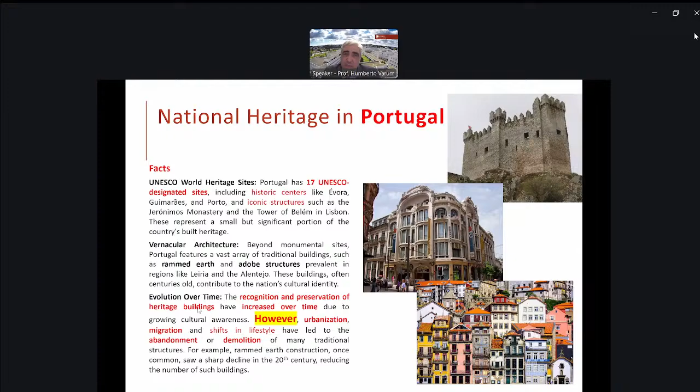But coming down in this list of values associated to our heritage, we should consider that apart from the heritage recognized by UNESCO, each country, and also for the case of Portugal, we do have a very long list of pieces of heritage that are recognized with value at national, regional, or eventual municipal level. And then moving again to other level, we have all the rest of the heritage that constitute our cities, our built heritage, that needs preservation, needs conservation, needs attention. So, in fact, the problem of heritage is a complex problem.

Allow me to say that since one of the main uses of the buildings is housing, we have to consider that there is an important concern in the world, which is the impressive increase of the prices of our houses, but also the renting prices are increasing a lot, at least in Portugal, as in many other countries in Europe. We are really close to a crisis. So this is something that has to be considered from the engineering perspective in order to look for solutions.

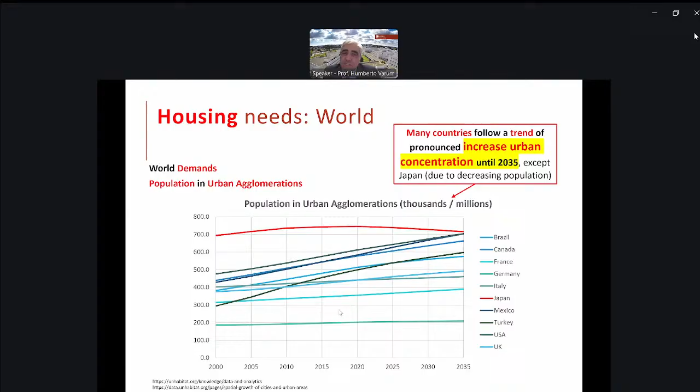And I'll come back to the problem later. In another direction, we have to recognize that in many countries in the world, we are still in a positive derivative tendency in the movement and immigration of population to the big cities, something that's also happening in Portugal. We're also assisting to a concentration of people in our larger cities. This is something that is a big concern where the engineering should find solutions.

And so saying that, around this problem of housing, for sure part of the problem can be, I will not say eliminated, but reduced, attenuated, by adapting our existing buildings. So this is why we should consider more and more seriously the conservation and the rehabilitation of our heritage.

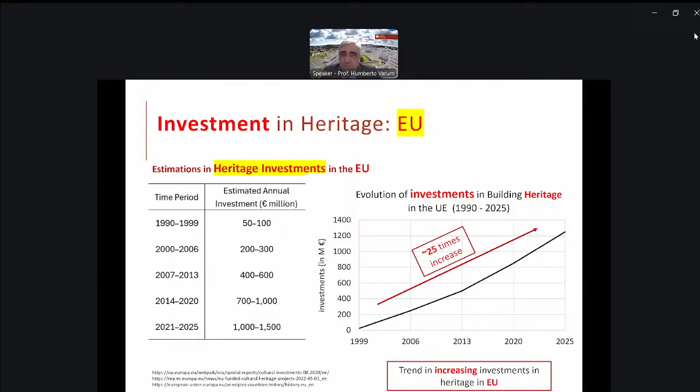We have to recognize that at least in Europe, in the last 25 years, we had an enormous increase of the investment in rehabilitation, in particular the rehabilitation of heritage. So it is also important to highlight that we should not stop this movement. We should, in fact, keep the investment in the rehabilitation of our heritage, and also not just the special heritage, but also the common heritage.

In another direction, I'd like to say that in many countries in Europe, and also in Portugal, we are in a positive derivative of the growth of cultural tourism that is pressing our cities, is pressing our heritage. So this is something that should be considered in all the policies of conservation and preservation of our heritage.

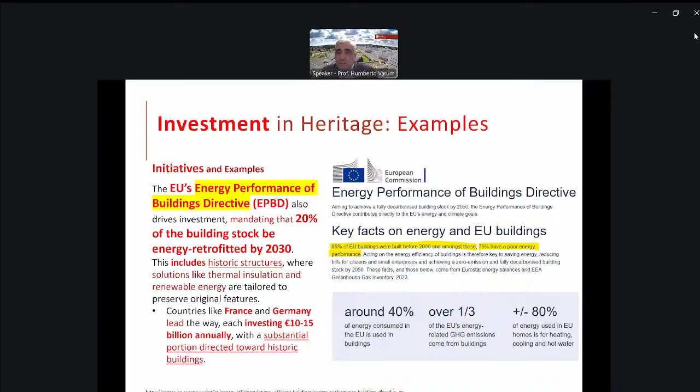In fact, in Europe, we have a very good set of examples of initiatives financed or incentivized by the European Commission in order to promote the rehabilitation of our buildings, both from the historical and heritage perspective, but also intending to improve their performance in terms of energy, as well as in terms of thermal comfort. We had, eventually not in the same measure, but you have in Europe also some initiatives that incentivize the improvement of the safety of our heritage.

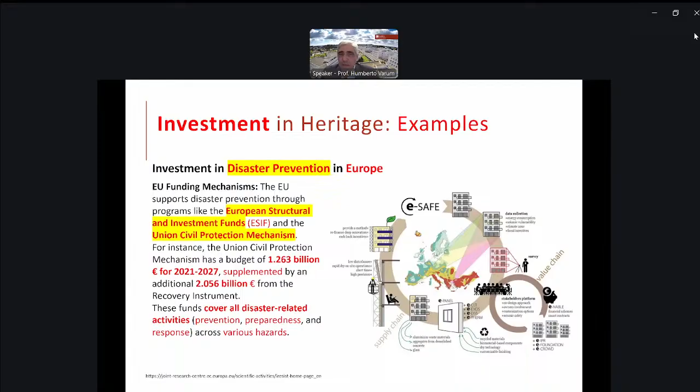I do believe, and there are very interesting movements in Europe that try to promote a renovation of heritage, provoking an equilibrium between the energy efficiency and thermal comfort, as well as the structural safety, particularly in all regards the seismic safety. And I truly believe that you should go in this direction, you should try to avoid eventual programs, eventual initiatives that will promote only energy improvement, energy performance improvement.

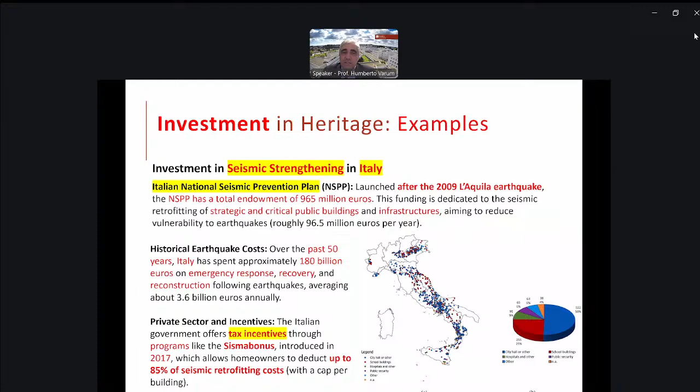Allow me please to refer here an example. This is the case of Italy, for which with different initiatives, there have been different programs that have promoted private initiatives and also some public initiatives in order to improve the seismic capacity of the buildings and of all the heritage in generic terms, for example, based with tax incentives.

But the interventions in heritage present a long list of challenges. Allow me please to highlight a couple of them. First, I have already referred to the pressure of tourism.

Second, the strong immigration movements that you are assisting all over the world, also in Europe. We should recognize that society is nowadays more demanding in what regards the performance requirements for our buildings. The codes we have in support of engineering activity are more dedicated to new buildings. Of course, sometimes you adapt, we have some codes specifically dedicated to rehabilitation, but eventually they are not at the same level of detailing as the other codes we use for new buildings.

And then the costs associated to rehabilitation, in fact, they tend to be higher in some situations, and that has to be considered. Another problem affecting many regions of the world is the shortage of skilled labor, workmanship, and also some experts in certain expertise fields. In civil engineering, for example, we are really witnessing a moment in which the demand from society is not at the same level as the number of civil engineers educated in our faculty, something society should look at with rigor in the future.

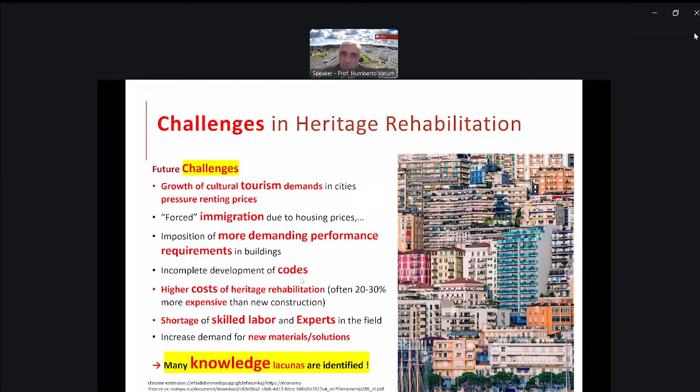And then another very important problem is knowledge. I should recognize that there are many situations where you are doing intervention in heritage with the proper level of knowledge of the building you are intervening in, with proper knowledge of the problems, with proper knowledge of the safety levels that we intend. But in many situations we are doing interventions eventually without an adequate level of knowledge. We'll come back to this point later on.

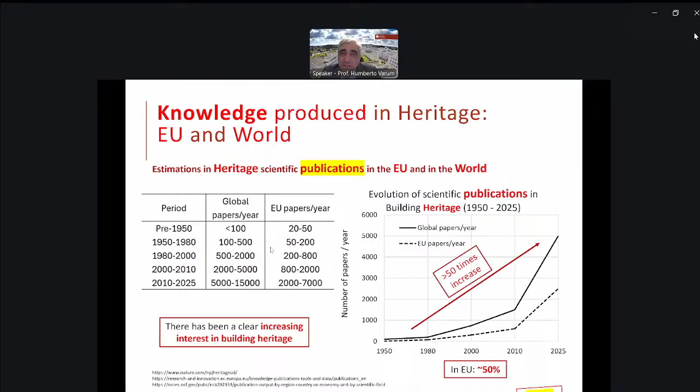The scientific community all over the world, but also in Europe, has given increased attention to the problem of heritage and to the problem of conservation and restoration of buildings. This is shown by numbers, for example, by publication numbers. But I have to say that we as academics should put our effort into simplifying the results of our scientific outputs in order to make them available and useful to society — the enterprises, the owners, and the urban planners who really need our research output, but simplified and oriented towards real interventions.

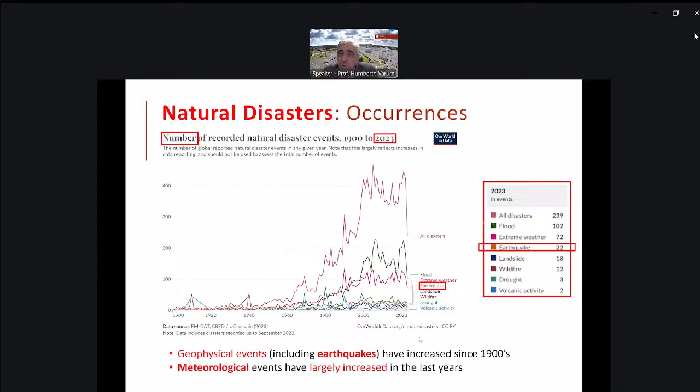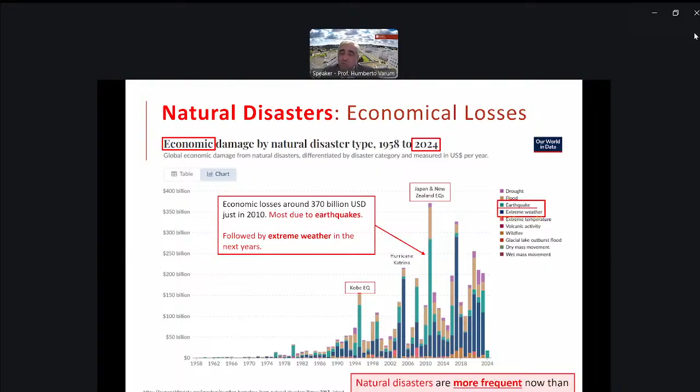In another direction, we can see in this plot that in the years you have one or more strong earthquakes, we see a peak, because among all the important natural disasters that affect our built heritage, earthquakes, when they happen, tend to affect larger areas, and they put to proof a larger number of buildings and infrastructures.

Among the natural and man-made disasters affecting our built heritage, allow me to refer to earthquakes. Here are some numbers. We recall every year, in particular these last years, severe earthquakes in different regions of the world that caused an important number of fatalities, people affected, and important economic losses. But of course, storms and windstorms are very frequent, particularly in some parts of the world. Floods, allow me to say, in Europe in the last 4 decades had caused larger economic losses due to floods than other regions of the world recognized for this source of hazard.

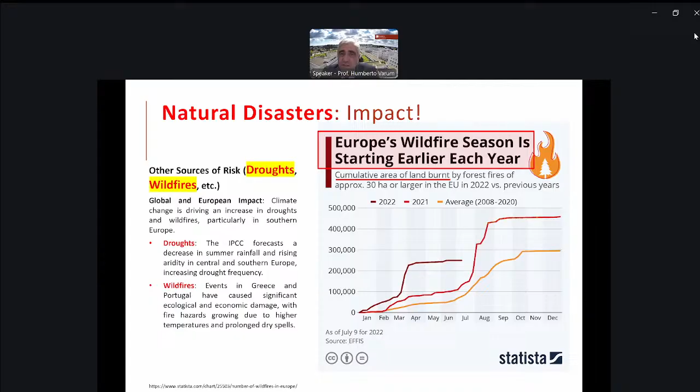In what regards wildfires, we are recognizing that in some parts of Europe, and also in Portugal, wildfires are starting earlier in the year and lasting for longer periods, which is a big concern, because in some cases they are also affecting built areas. Fires — we all recall the important fire that destroyed parts of the Notre Dame Cathedral. We also had, in Portugal in the 80s, at the end of the 80s, a very important urban fire that destroyed part of our city, our capital.

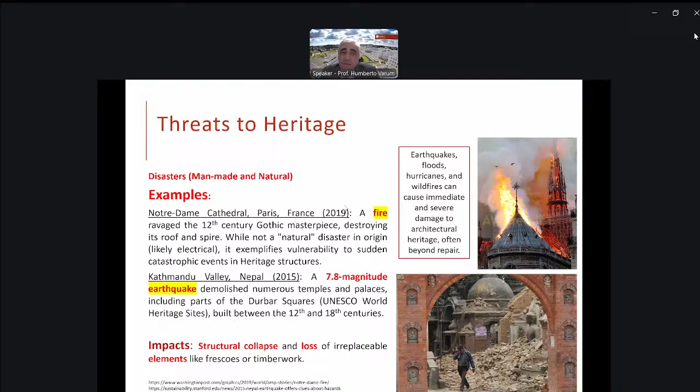In 2015, we can refer as an example the big earthquake that affected the Kathmandu Valley in Nepal. We also remember well the recurrent flooding affecting Venice in Italy, and some heavy rains affecting Machu Picchu, Peru, but also other areas around the world.

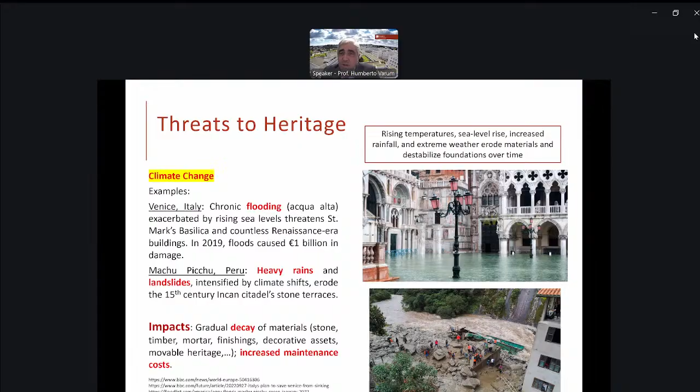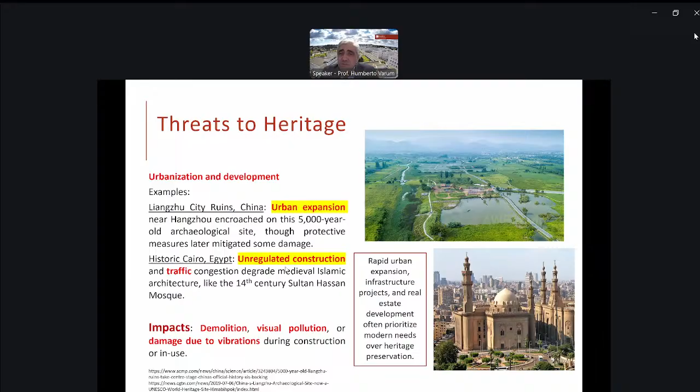Climate changes, in fact, are affecting more regularly our built heritage, something you have to consider. In regions where urban expansion puts pressure on our heritage, but also where you have unregulated construction, these are other vectors that put enormous pressure on our built environment regions.

War and conflicts are also putting pressure—I can refer to the crisis in Syria and Bosnia-Herzegovina, and we know well the crisis you are living in Europe. We hope this will soon be overpassed, but again, war and conflicts are affecting our built heritage, not just buildings, but something you have to consider.

Vandalism and pollution, especially in some parts of the world, are also affecting our communities, but particularly our heritage. Tourism overload is very important in some monuments, but also in some regions, particularly in Porto City, for example.

Nowadays we are living this experience. In fact, the overload pressure coming from tourism is putting pressure on the city center, on our built heritage, and something that has to be considered and solved from an engineering perspective.

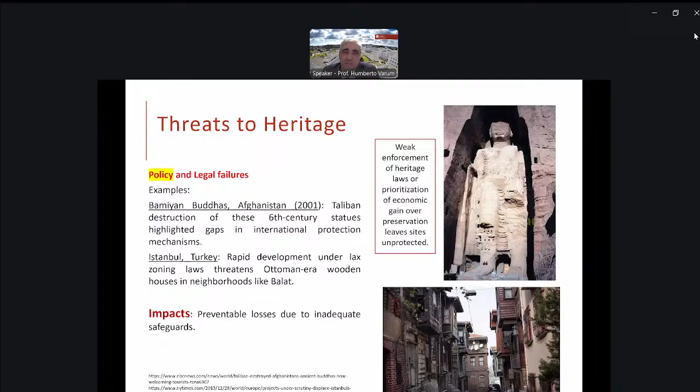Aging, of course, and then eventually some legal failures or improper policies in built heritage conservation may compromise the future of this important heritage that you have inherited and that you intend to pass on to future generations.

So allow me to revise the concept of risk. We are all familiar with this concept, but it's always important to come back to it. Risk is influenced by three main pillars, three main vectors: hazard, vulnerability, and exposure.

The hazard, for example, can be redefined in terms of the source of hazard coming from seismic activity—though we could redefine this concept for other types of hazard too. For seismic hazard specifically, hazard can be defined as the probability of a certain seismic action occurring in a certain place, with certain characteristics, for a certain period of time.

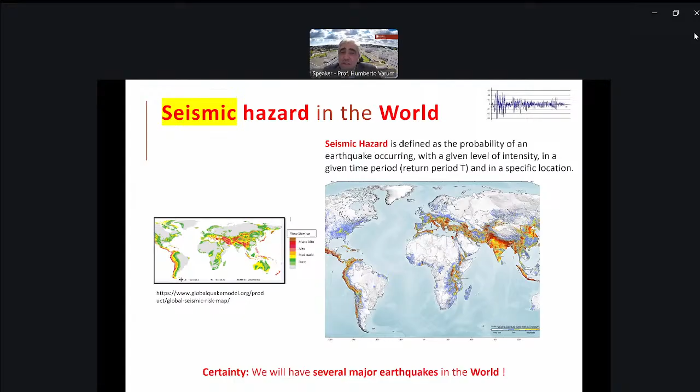We know that you are monitoring continuously all the globe, so we know much more nowadays than in the past regarding seismic hazard. But of course, you cannot predict when the next earthquake will happen and how it will affect our heritage.

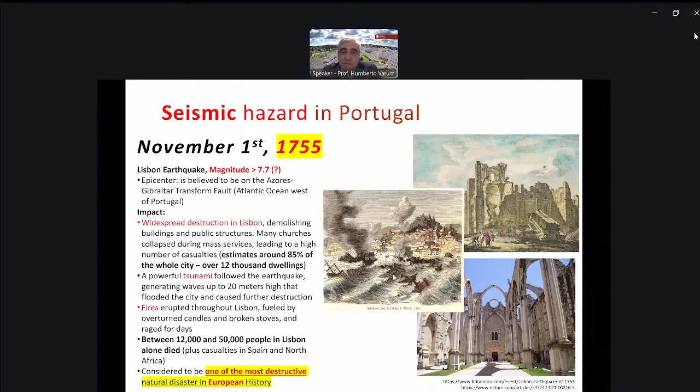It would be incorrect to talk about earthquakes in Portugal without referring to the big earthquake in the mid-18th century that changed the history of Portugal and also had important influence on the history of the world. It is recognized as one of the most destructive natural disasters in European history.

Another pillar that affects risk is vulnerability. Vulnerability, to define it simply, is the capacity that buildings or building infrastructure have to respond safely to a certain level of demand.

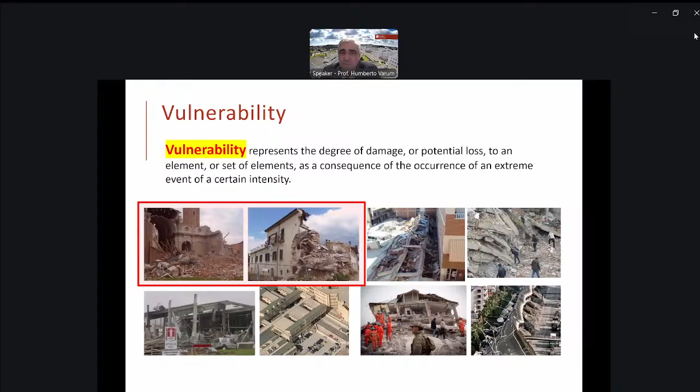Then there's exposure, the third pillar, related to the number of people using the building or infrastructure, and eventually also related to the economic and cultural value of the goods associated with the building.

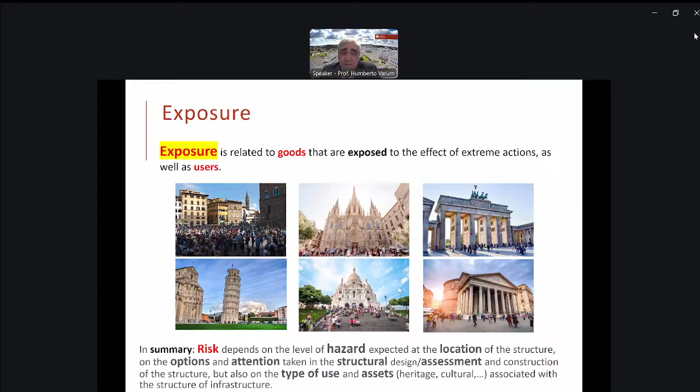So recognizing that risk is influenced by those three vectors, when we're talking about new buildings, new infrastructure, or new cities, from the engineering perspective we can manage risk by influencing those three vectors.

But talking about heritage, we recognize that we cannot do the same—our capacity is limited. We should put all our effort into reducing the vulnerability of the existing heritage in order to reduce the risk.

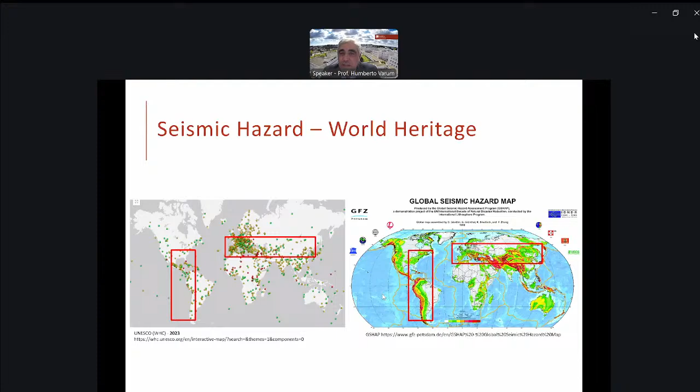In this final slide of this part of my presentation, I'd like to highlight that a great part of our heritage cities, a great part of our oldest and most important heritage, is located in areas with moderate to high seismic hazard. So talking about conservation of this heritage should always be done considering the eventual seismic activity and seismic hazard.

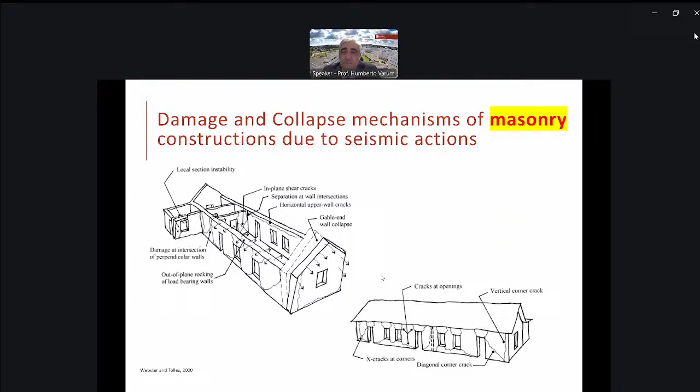Very briefly, allow me to revise the more common causes of collapse or poor behavior of our existing buildings. Let's start with older constructions made of masonry, eventually with some timber elements at the roof and floors. Before the introduction of reinforced concrete in current buildings, construction all over the world was based on those natural materials.

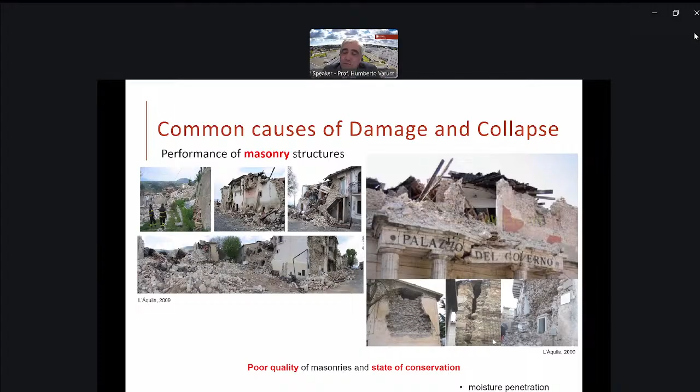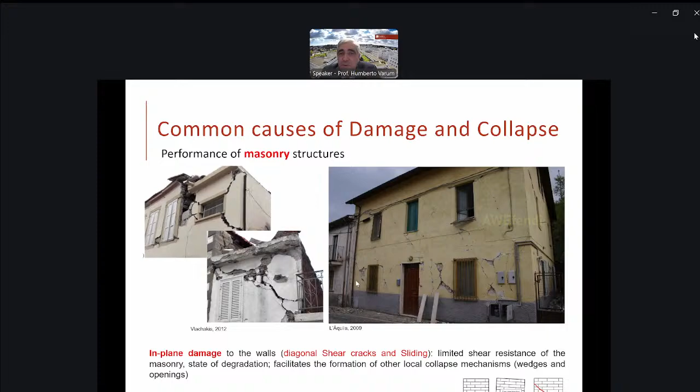We do recognize from the experience we have from research, but also from all that we have observed and keep observing in regions affected by earthquakes, that our masonry, when poor in quality or in a poor state of conservation, may affect the performance of our buildings. These typical masonries normally have very high stiffness and attract large amounts of force, but they have a weakness: their capacity in-plane is limited, and when they collapse, they collapse in a fragile manner.

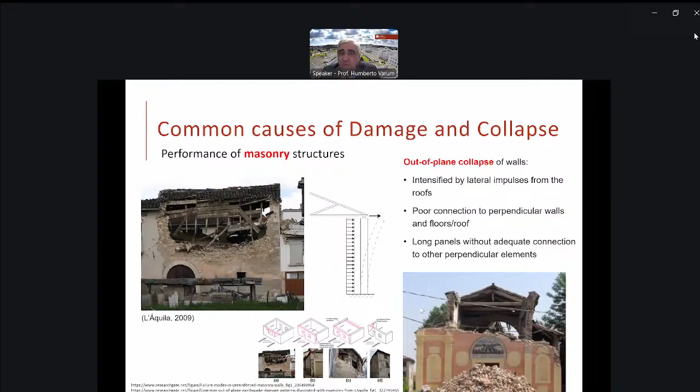Also, depending on the geometry of the buildings or infrastructures, and on how the different components are connected among them, they may in some situations exhibit vulnerable out-of-plane collapse, something that is quite studied in different universities in Europe.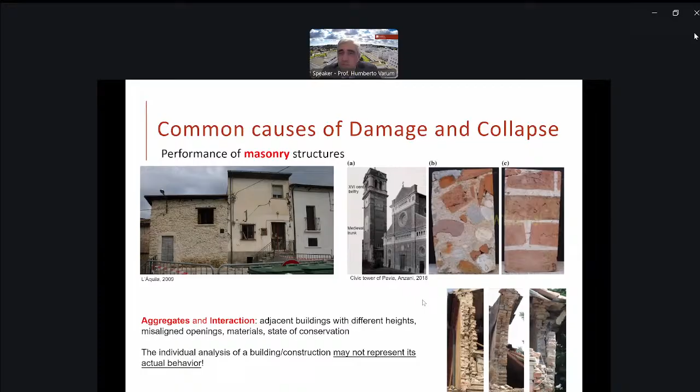Critical points such as building corners and openings tend to concentrate demands, and these are points where damage can start. In aggregates, in urban areas, the interaction between buildings in some cases may save our buildings, in other cases may eventually promote

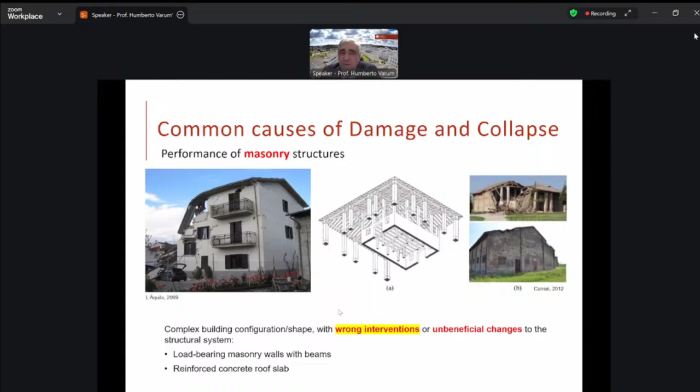the collapse or poor behavior. Finally, we have to consider that in some cases, interventions on buildings using inadequate materials or inadequate solutions may eventually increase the vulnerability of these old structures.

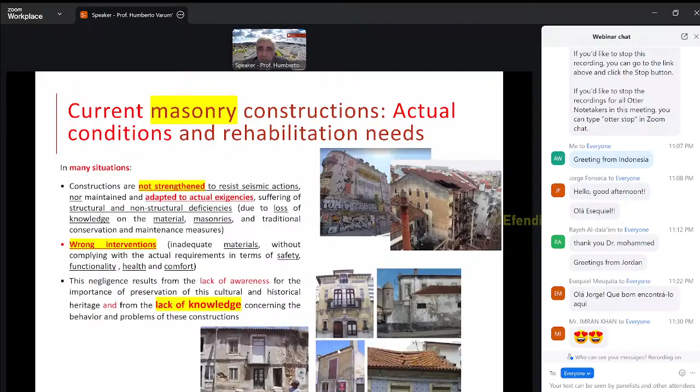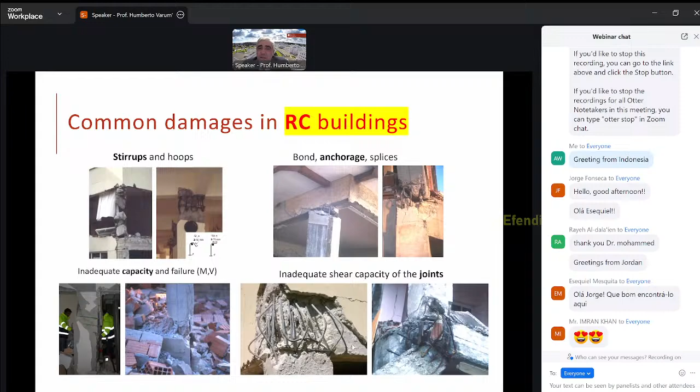Moving now to reinforced concrete buildings, we know also from observing areas affected by earthquakes, and from research results all over the world, what are the potential weaknesses of our building structural elements. Of course, the detailing of stirrups, the details of anchorage splices, beam-column joints, or the connections between walls and slabs, all of which must be properly designed and detailed to promote proper behavior.

But then we have the well-known strong beam, weak column mechanism, especially in older buildings that were designed mainly for vertical loads or very low lateral demands. These may present mechanisms that tend to provoke premature collapse of these buildings, including the short column mechanism and irregularity, something I will come back to later.

And again, the interaction between buildings in urban areas is a problem that may affect the capacity and, at the end of the day, the safety of our buildings.

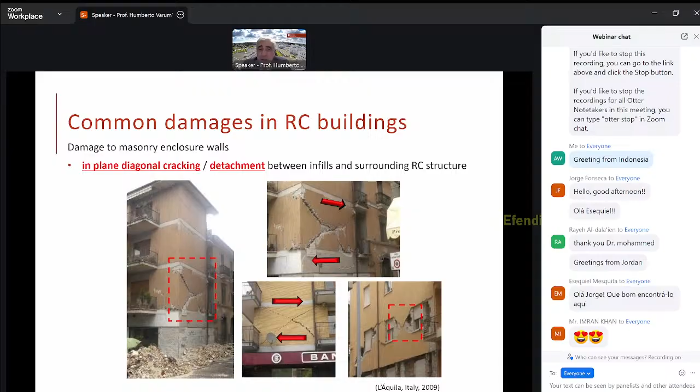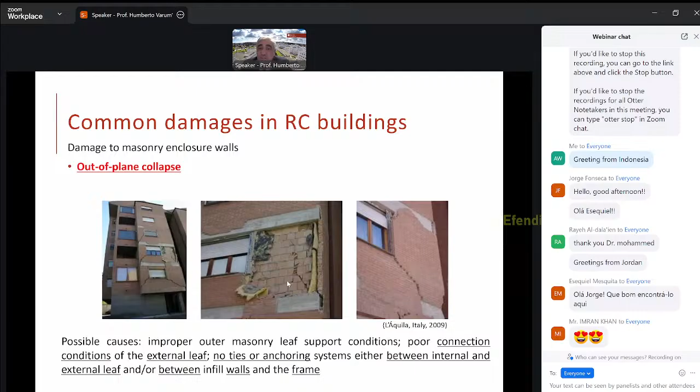The in-plane capacity of non-structural elements, in this case our infill masonry: we know that this type of infill masonry may be very rigid and stiff, but has associated fragilities because it has limited capacity and tends to behave in a fragile manner. The out-of-plane collapse, something I will return to later, is also recognized as a potential fragility of reinforced concrete buildings.

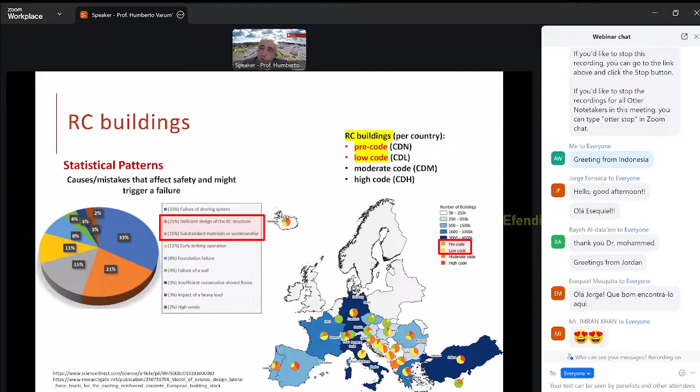From statistics, we may find in the literature different authors presenting and discussing these numbers, but allow me to say that a great part of our modern built heritage in reinforced concrete was designed and constructed in a period when codes were not at the same level of development as current codes. So an important part of our built heritage was designed prior to modern codes, or with first versions of national codes that were not as rigorous or detailed as those used nowadays in designing new buildings.

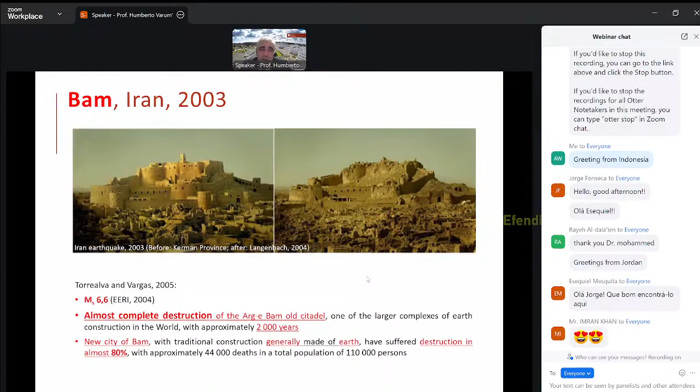From recent earthquakes, we have learned messages, and you keep learning messages every time an earthquake affects our built heritage. Allow me to refer to the city of Bam, practically totally destroyed during the earthquake in 2003 in Iran. Another example: in Peru in 2007, a big earthquake affected the city of Pisco, where about 80% of the buildings collapsed or suffered irreparable damage. I'm talking about houses, but also some churches and other types of important heritage.

Also in Peru, in 2014, a moderate earthquake of magnitude 4.9 affected particularly Pisco, and again here almost all the adobe constructions were damaged, including some churches. This means that many of our existing heritage, especially the oldest with poor materials, are in fact vulnerable, and we have to recognize this, keep attention to it, and prepare future policies to consider this fact.

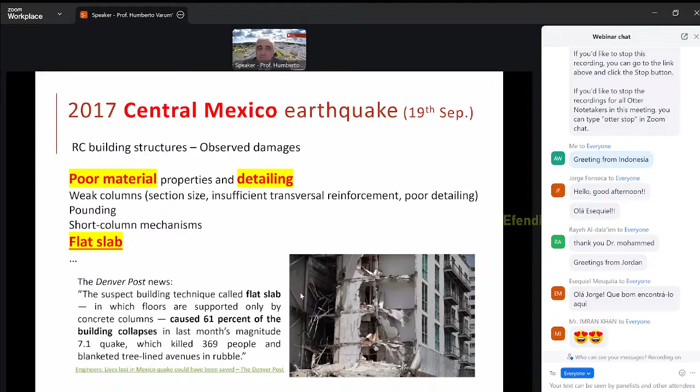Central Mexico, 2017: among the buildings that collapsed or experienced poor behavior, the same causes were identified: poor materials, poor detailing, flat slabs, which is a big concern for us nowadays, and irregularities.

If you compare what happened in the big earthquake of Mexico in 1985, this was at that time one of the causes appointed as a justification for the poor behavior of many buildings. In 2017, 30 years after, irregularities continue to be one of the main important problems, especially in building corners, in these recent earthquakes in Mexico that affected Mexico City, as you can see in this video.

So the non-regular distribution of infills in plan as well as in elevation ends up promoting an irregular response, an irregular distribution of the damage, and eventually promoting the collapse and poor behavior of some buildings.

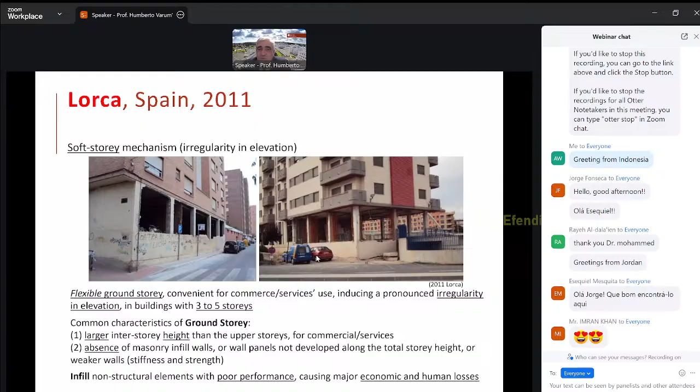And again, in Lorca, 2011, one of the causes associated with the poor behavior of many buildings was again associated to the irregularity, especially for buildings with eventually regular structural systems but with irregular distribution of infills.

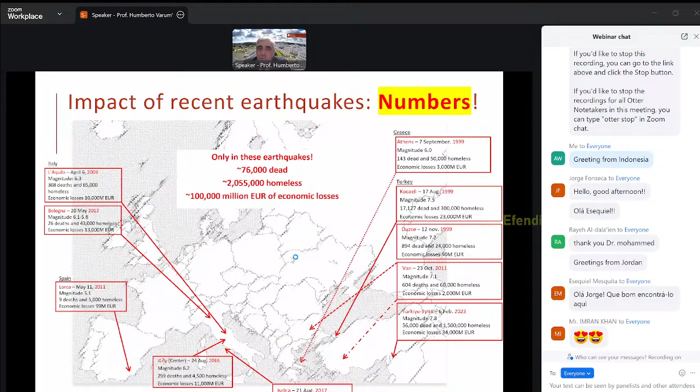From the numbers, summing up the impact of the recent earthquakes in the last 25 years in Southern Europe, we have seen, considering both affected people in terms of life, in terms of homeless, but also considering the economic losses, that those numbers keep increasing. We should do our effort in order to put the civil engineering knowledge in the response to this problem, in order to prepare better our buildings, to prepare better our heritage.

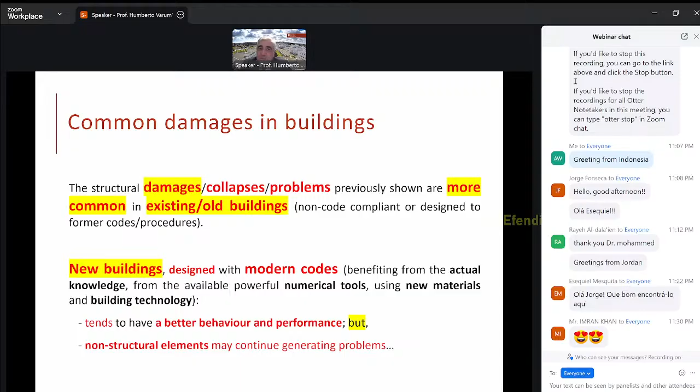From all that you have seen in these last decades, we should recognize in a simple manner that most of the problems are located in older buildings that tend to be more vulnerable. But be careful, because new buildings designed with new codes, if you are not putting proper attention to the problem of irregularities as well as the influence of the infill masonry, eventually you are introducing in our built heritage new buildings with new types of vulnerabilities.

In what regards retrofitting approaches and solutions, in fact we do have many solutions, but we know that in the decision of an eventual strategy to be adopted in the rehabilitation or retrofitting of a building or a set of buildings, we should consider a long list of parameters. But please allow me to detach one: knowledge.

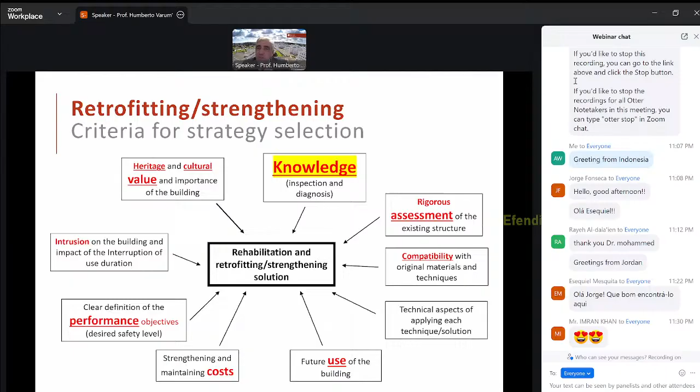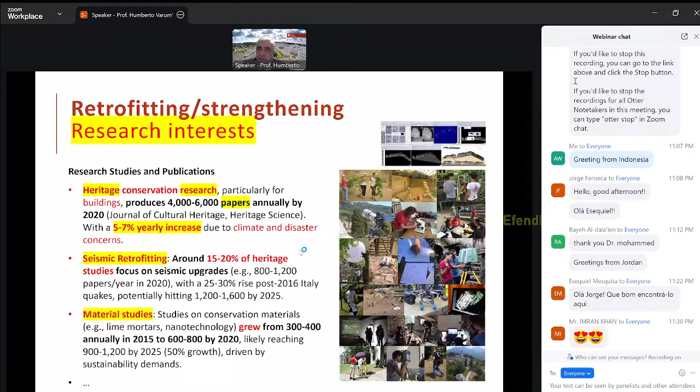In fact, we do have more and more examples of good interventions with rigorous approaches, adopting the proper materials with a proper analysis. We are preparing better and better our professionals to approach this problem. Our companies are also getting new skills, and they are getting more and more prepared to approach this problem. But we should highlight that, in fact, in any intervention, in any decision, we should take the decision based on the proper level of knowledge.

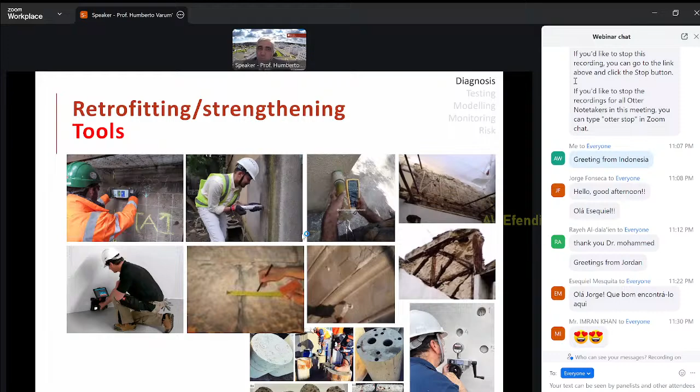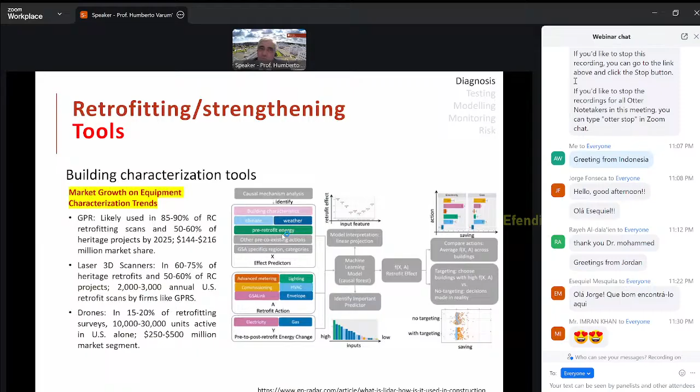As Tiago referred in his introduction, in fact, you have a long set of tools that may support us from inspection until the intervention. We have new tools that are becoming more and more commonly used in the characterization of our buildings, in the characterization of the pathology. We should use them, and in fact the numbers highlight that this is happening.

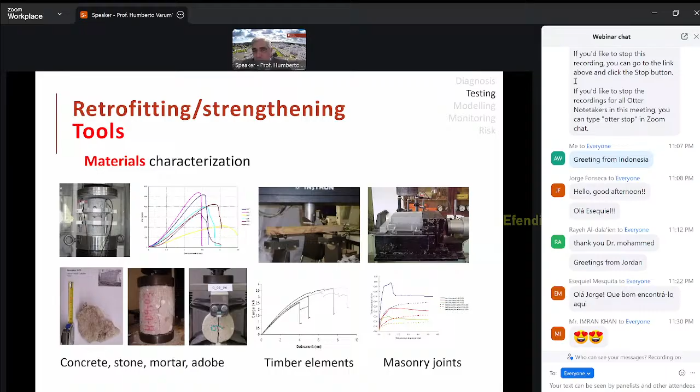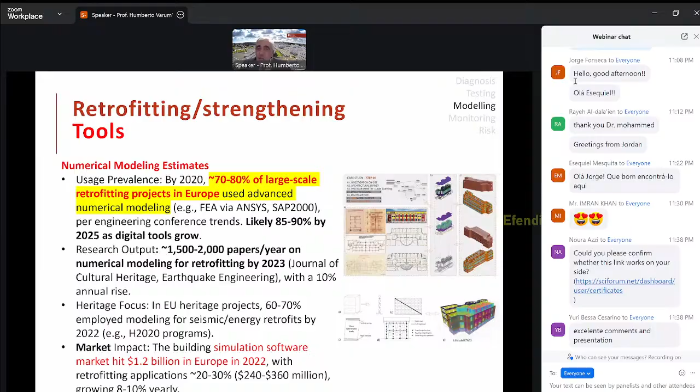In fact, we do have in our laboratories, we do have in our universities, but also many companies are getting new skills and new capacities in order to test properly the materials as well as the structural systems. In terms of what regards modeling, we have powerful models that are used more and more in the characterization of a built heritage building, that allow us to take a more rigorous decision at the time that you are proposing some solution.

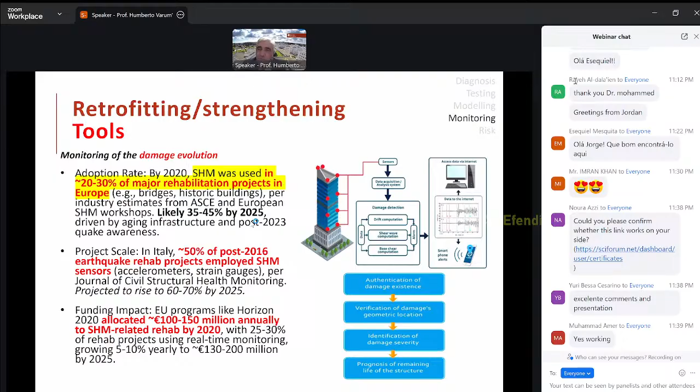But those models need calibration. You should consider that apart from the test characterization, we also have to use, and you have this potential to use, monitoring, also something that will be the central speech of Professor Ilara. But something that I have to recognize, even though we have these powerful tools, they are still underused. You have to reinforce more and more the use of this strategy in order to better understand the behavior of our buildings as well as of our infrastructure.

In fact, those tools give us an enormous opportunity to do better our job, to prepare better the intervention of rehabilitation. But we should never disregard the contribution of the engineering as well as the other professionals in controlling all the process, from the inspection until passing to the phase of design, but also in controlling the intervention.

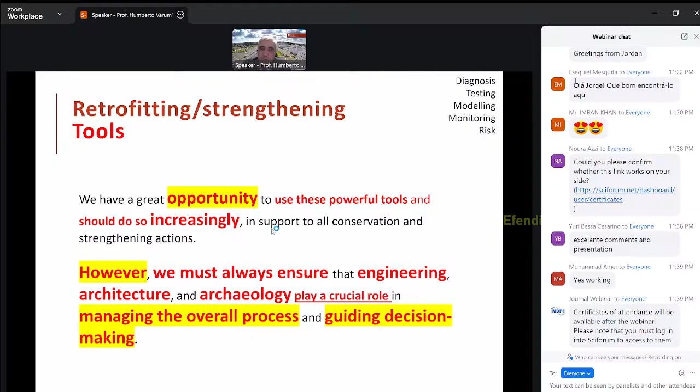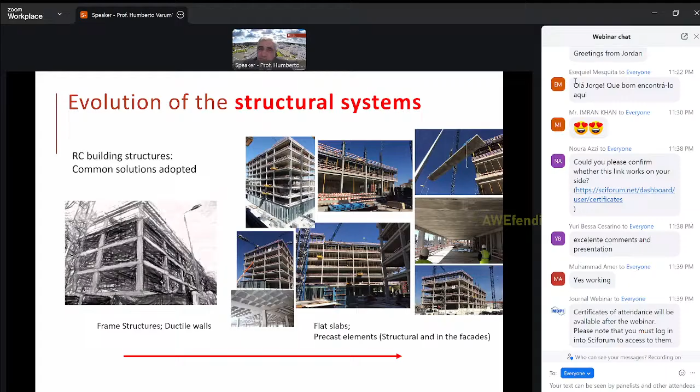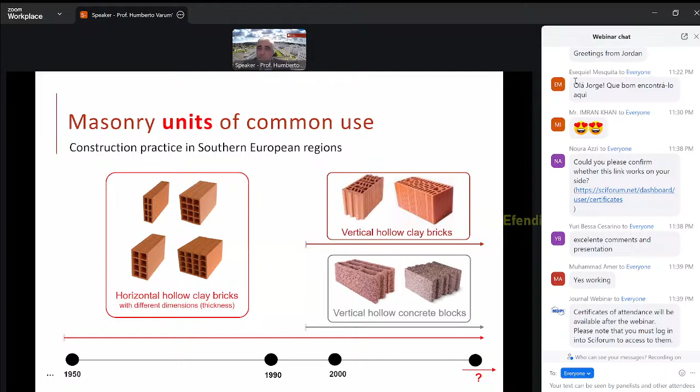So those tools will be an enormous help supporting all the interventions, but the engineering contribution should always command all the process. To conclude, to define policies for the retrofitting or rehabilitation of built heritage, we should understand properly how the structural systems evolved during time in the construction of the buildings, but also the non-structural materials and solutions, how and how much we have introduced changes during time, because different buildings from different epochs may present different characteristics, so any decision should be based on proper knowledge of that.

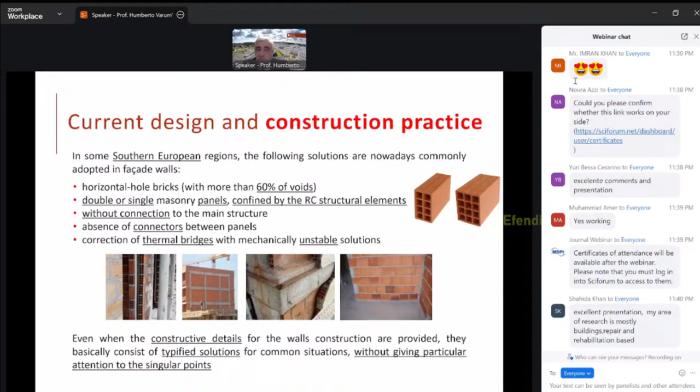Allow me to say that, from our experience, the detail followed in the design, detailing, and construction of non-structural elements is not at the same level of rigor as that posed in the detail and construction of structural elements, something that has to be looked at in the future.

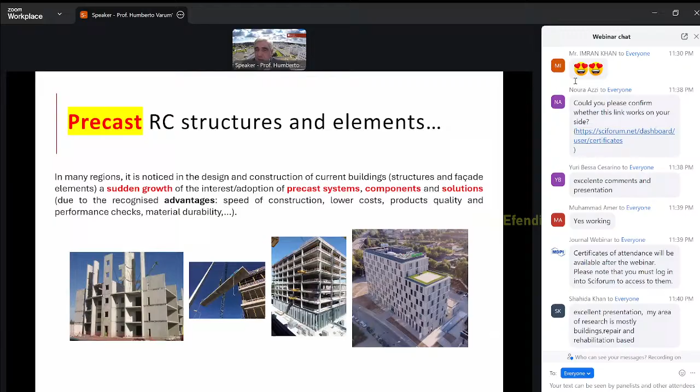Precast: in many regions of the world, due to the crisis in housing, but particularly in Portugal, we are seeing an important introduction or reintroduction of precast systems and solutions in the construction of our buildings. We should not leave our industry alone. We should put our universities and expertise in support of those companies in order to develop solutions that respond to safety, which is our basic requirement in our constructions, our buildings.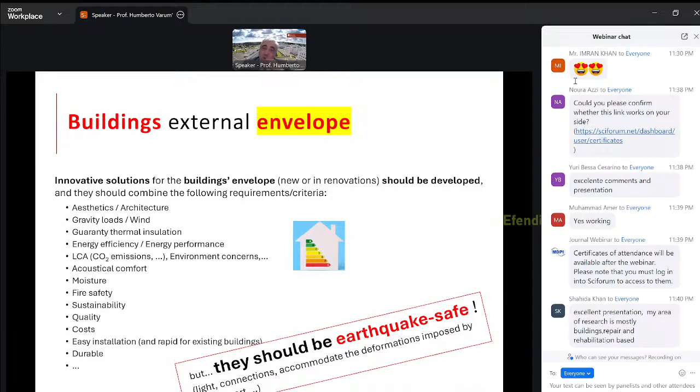We know and recognize that due to the over-regulation of the construction sector, we have enormous pressure in the decisions we take in our buildings to accommodate a long list of requirements. All of them are very important, but any solution we adopt, both in a new building and in the retrofitting of an existing building, we should recommend solutions that respect that long list of requirements but should not introduce new vulnerabilities.

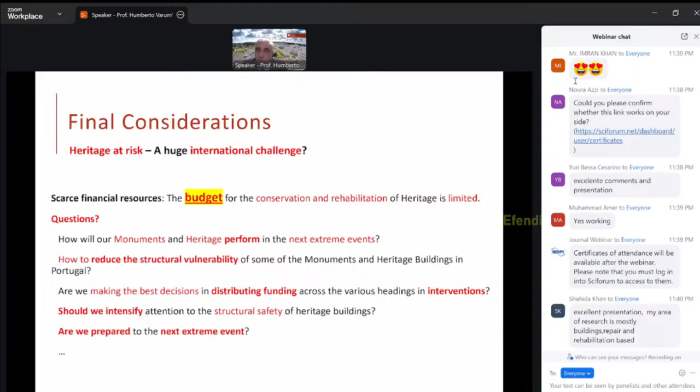Talking about heritage, the challenge is huge. We should be prepared. Budget will always be limited, but from an engineering perspective, with engineering tools, we'll be able to embrace this problem. Solutions, as requested by Tiago.

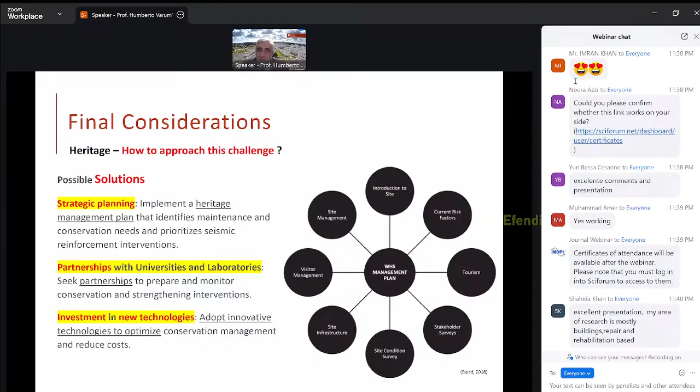First, at the national and regional levels, we need strategic planning for retrofitting and conservation of our heritage. We need to use more and more the partnerships between universities, laboratories, society, designers, constructors, and building owners. We have to increase investment in new technologies. We have to produce standards and recommendations adequate for rehabilitation.

We have to insist on the development of professional training, from workmanship to the more skilled engineers. And we have to raise public awareness about this big problem and this big challenge, which is our heritage. With that, I conclude. Thank you for your attention.

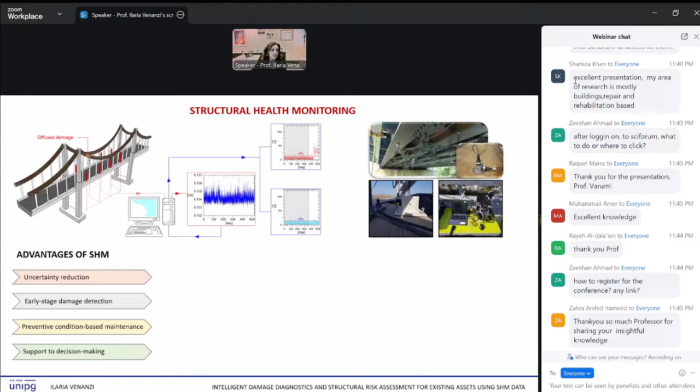SHM presents many advantages in the context of safety assessment, as it allows uncertainty reduction, early stage damage detection, and it supports condition-based maintenance and decision-making. SHM involves several stages, from the simplest to the most complex.

Stage 1 regards damage detection, answering the question: is the structure damaged or not? The following two stages regard localization and quantification, answering where the damage area is located and what is the extent of damage. The final stage is damage prediction, answering what is the remaining service life of a structure.

Analytical techniques to perform these tasks can be classified into data-driven and model-based approaches. Data-driven approach relies on sensor data and uses statistical algorithms or machine learning to learn patterns that distinguish healthy and damaged states. Conversely, model-based approach uses physics-based analytical or numerical models, and damage detection is performed by comparing the structure's measured behavior to the predicted one exploiting the model.

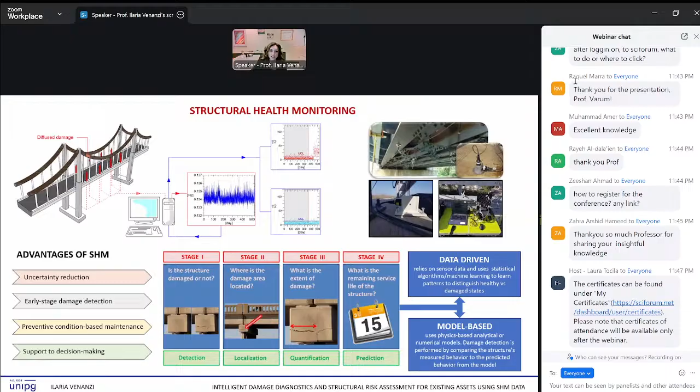Data-driven approaches mainly answer the first question; they can be used for anomaly detection, while to assess damage location, quantification, and classification, very often we need to refer to model-based approaches. If the task is damage classification and tracking of damage evolution over time, we need to refer to a model-based approach.

So we need to calibrate a high-fidelity finite element model using all the available information: original structural design information, non-destructive evaluation, and structural health monitoring data, to calibrate this model.

This model constitutes a relationship between input and output parameters. Input parameters are damage-sensitive parameters, like those related to stiffness of different parts of the structure, and output parameters are response parameters that we can obtain from a structural health monitoring system.

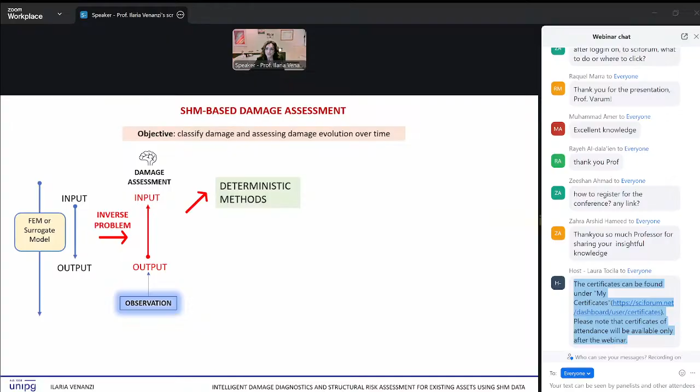We can use deterministic methods that formulate the inverse problem as an optimization problem and try to minimize a cost function that measures the discrepancy between measured and simulated response. Or we can use Bayesian approaches that frame the inverse problem as a probabilistic inference problem.

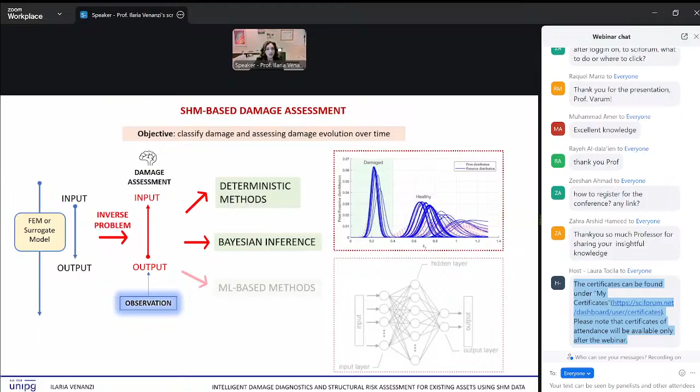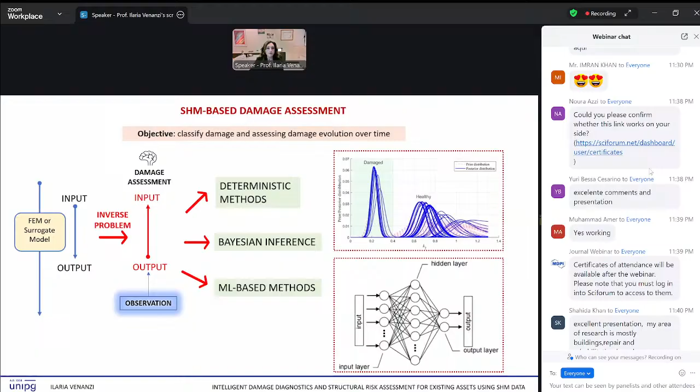Finally, we can use machine learning-based methods that solve the inverse problem by learning directly from SHM data, with little or no explicit physical modeling.

Based on this, in the following of this presentation I will illustrate four different approaches developed by our group, which share the general objective of detecting or classifying damage in various types of structures using different approaches.

The first one I will present regards a Bayesian model updating and data fusion approach for damage classification. The second one is a machine learning based method for anomaly detection in masonry structures. The third one regards the use of Bayesian neural networks for probabilistic damage assessment.

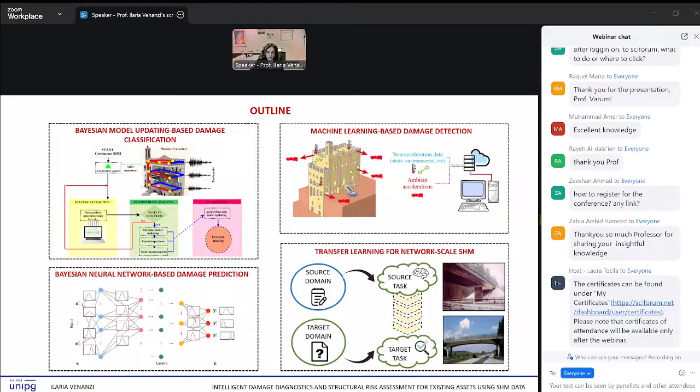And finally, I will give you some hints on what is transfer learning, with the purpose of sharing information at the network scale among different structures to improve SHM-based damage detection. Let's start with the first approach.

The case study to which we will refer is the Consoli Palace, which is a medieval building located in Umbria, my region, in particular in a city called Gubbio.

In this building, a continuous monitoring system was installed in 2017 by our research group, and the current SHM system, which has been improved over time, consists of 12 accelerometers, linear variable transducers, and 6 thermocouples.

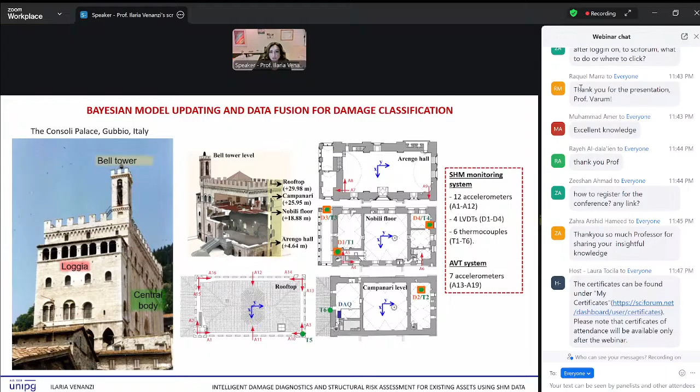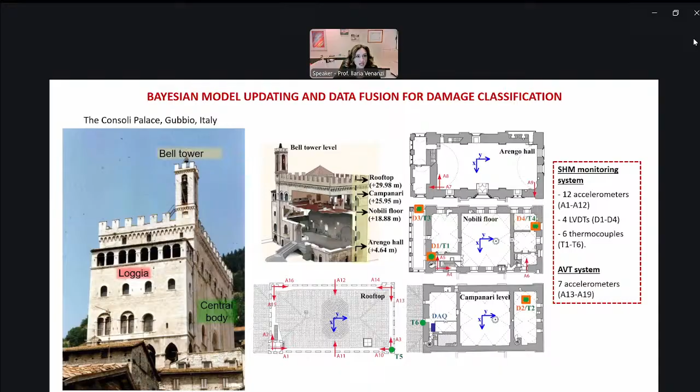Then in May 2021, ambient vibration tests were carried out using additional accelerometers to adequately capture the dynamic behavior of the building and also of the bell tower, which showed an independent, likely different behavior that had to be double-checked.